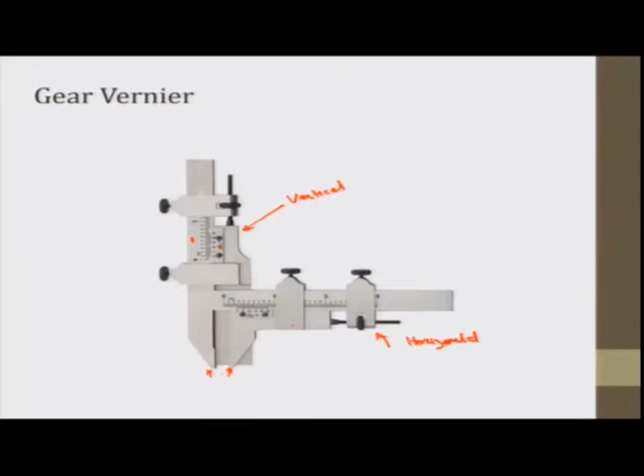So, we can see that there are two jaws, and the jaw that is connected to the vertical scale has a plate attached to it. This is the plate attached to it. The purpose of this plate is that when we try to measure the dimensions of the gear, this will lock towards the outer diameter of the gear. Okay, we will show you right now.

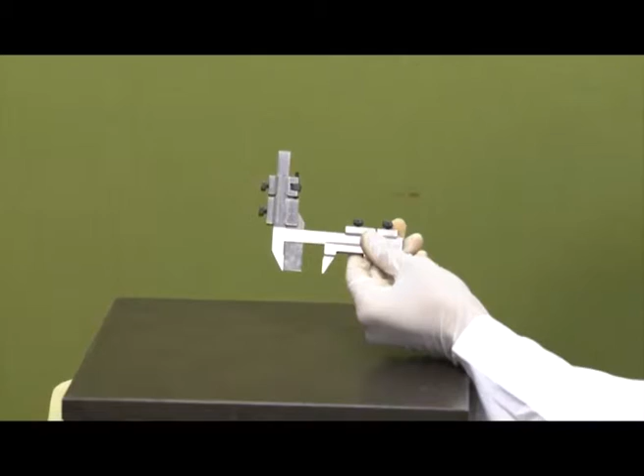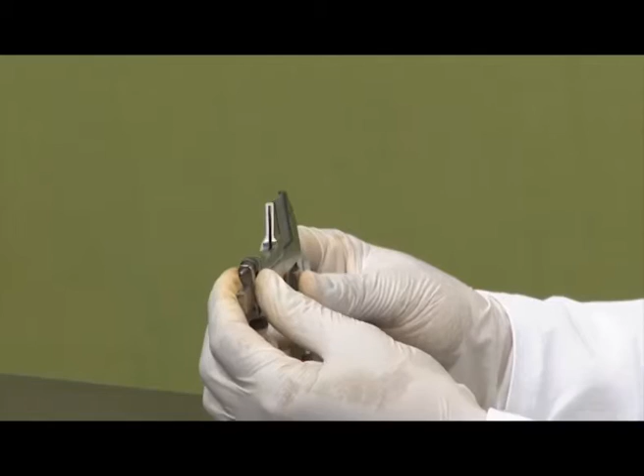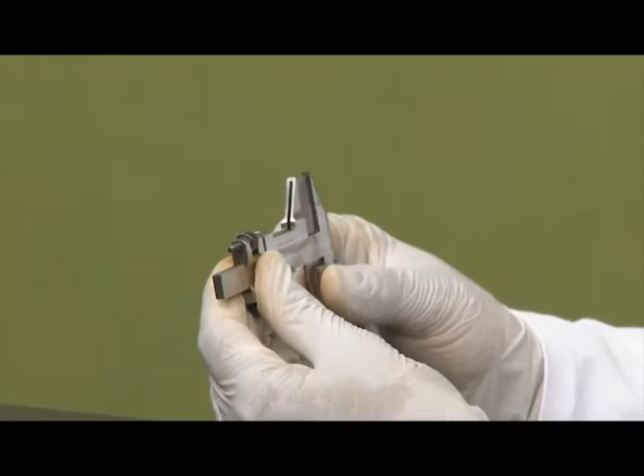And there is another horizontal scale. When I close the horizontal scale, you can see that there is a slot here in the horizontal scale, and this plate can move inside this slot. So, this is the horizontal scale, this is the vertical scale. The vertical jaw, I can say the horizontal jaw; however, this is a caliper only.

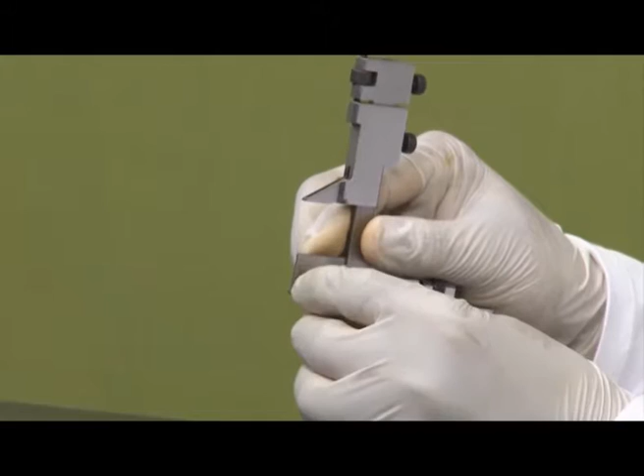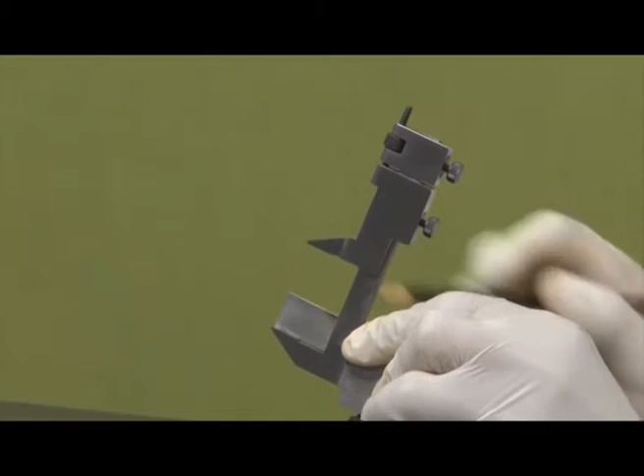So, you can see that this distance, the distance of the plate from the tip of this jaw, is about 1 mm. There is a small distance here. This 1 mm is already calibrated in the instrument.

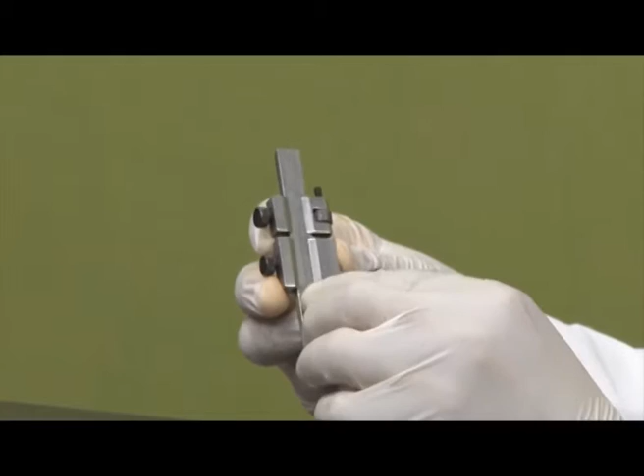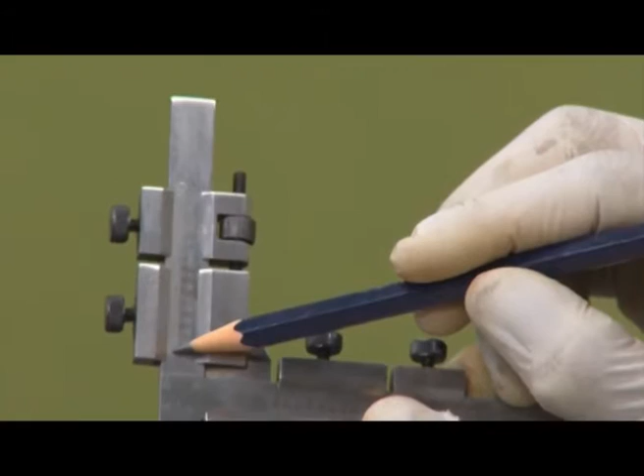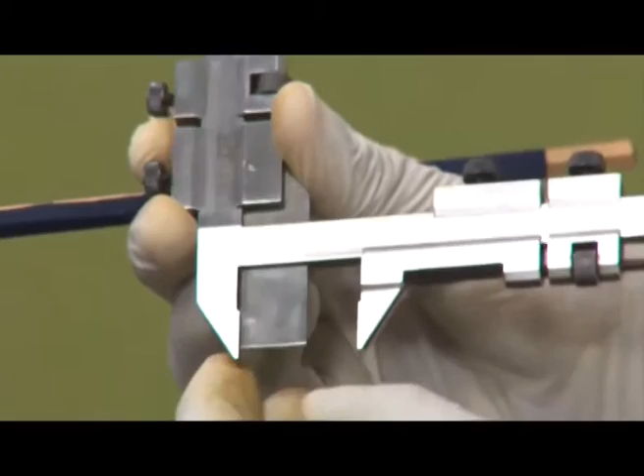If I close it here, you can see that 0 here is coinciding not with 0, but with the first reading, that is 1 mm. This 0 is coinciding with the first reading, not the 0. So, this is the adjustment that is made to adjust this length.

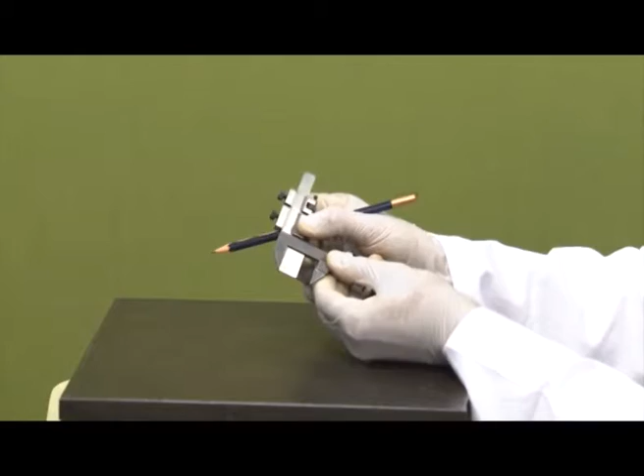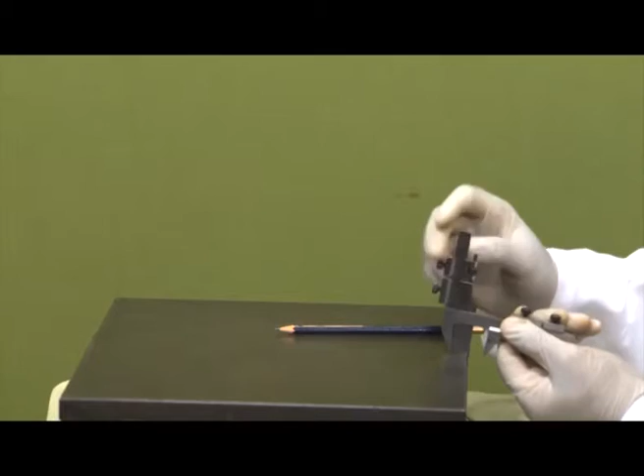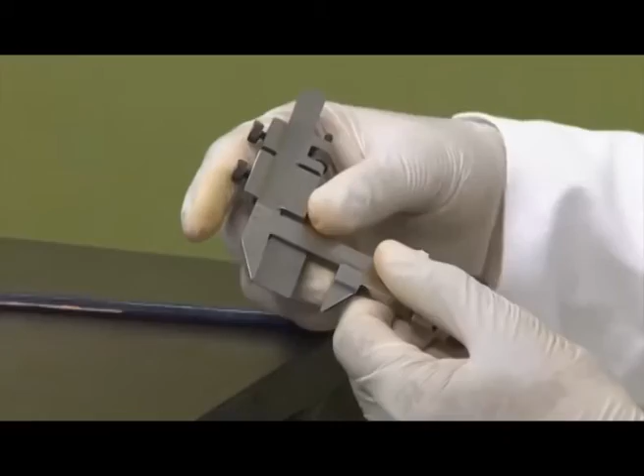However, if I remove my horizontal scale, it can extend further. So, if I touch it with a surface plate completely, then lock my screws, now we can see that this is exactly flat, and here the 0 is coinciding with the 0. But our purpose is to measure the feature of a gear, exactly the gear tooth. So, when I insert it, this 1 mm adjustment is here.

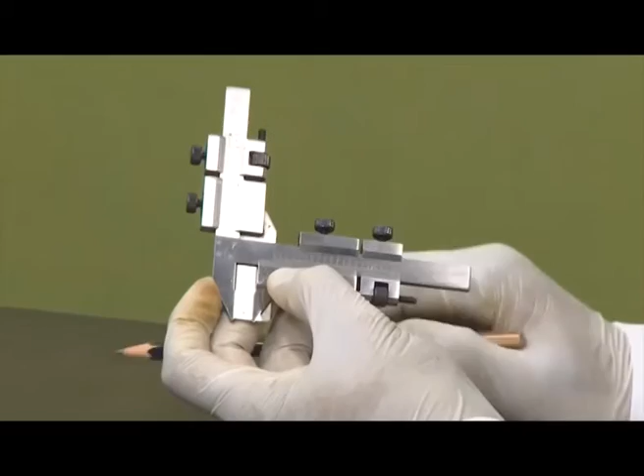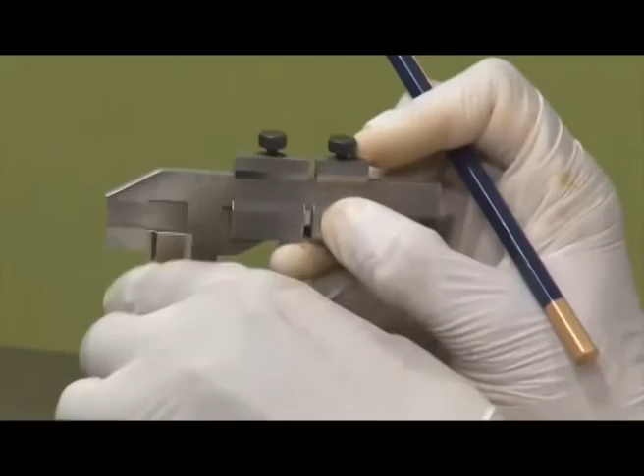Now, to find the least count, you can see that there are 25 divisions on the vernier scale. And it is interesting to note that on the main scale between 0 and 1, there are actually 4 divisions. In general, we have 5 divisions between 0 and 1, but here we have 4 divisions: 1, 2, 3 and 4.

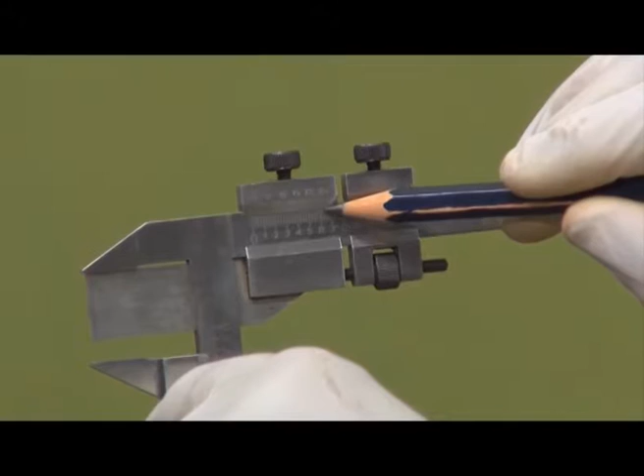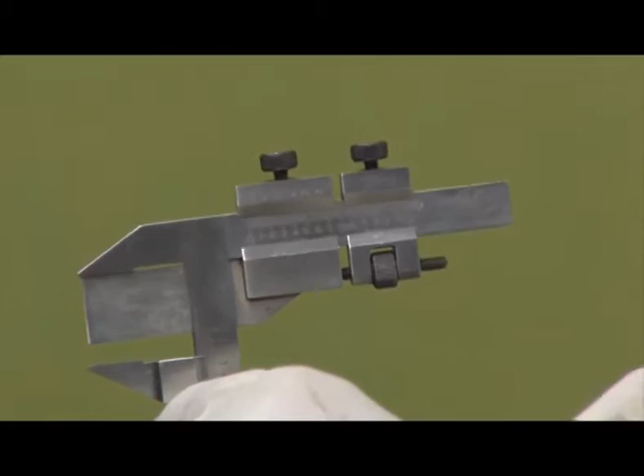So, you can see that the last reading is coinciding with 6.1. Actually, this 0.1 is the adjustment here, so it actually has to coincide with the 6th reading. So, 6 into 4 is 24, and these are 25. So, I can calculate the least count of the vernier caliper. We can see that 25 vernier scale divisions are equal to 24 main scale divisions, which means 1 vernier scale division is equal to 24/25 main scale divisions.

Therefore, least count is equal to 1 main scale division minus 1 vernier scale division, which is equal to 1 main scale division minus 24/25 main scale divisions, which is equal to (1 minus 24/25) main scale divisions, which is equal to 1/25 main scale divisions, which is equal to 0.04 mm. This is our least count.

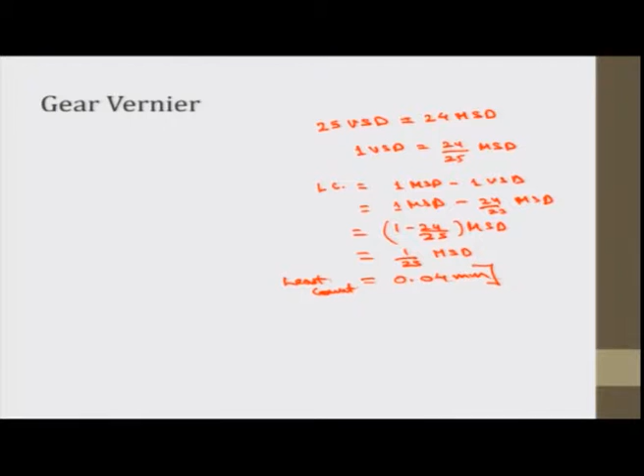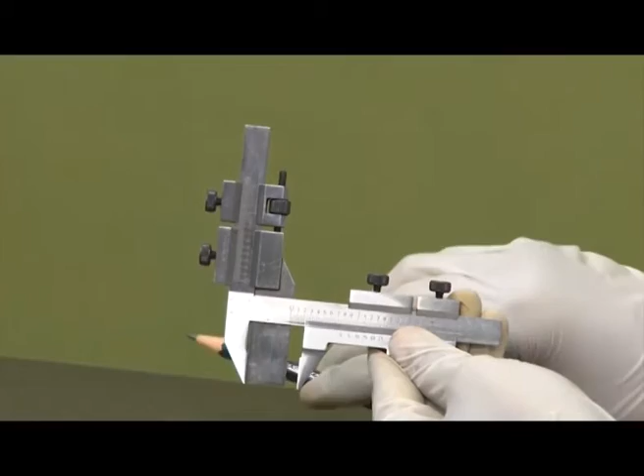So, we can see that on both the vertical and the horizontal scales, we have similar types of vernier scales, similar types of divisions. The only difference in the vertical scale was that the first division was not coinciding. It was an adjustment to make this plate enter into the horizontal scale. So, we have got the least count.

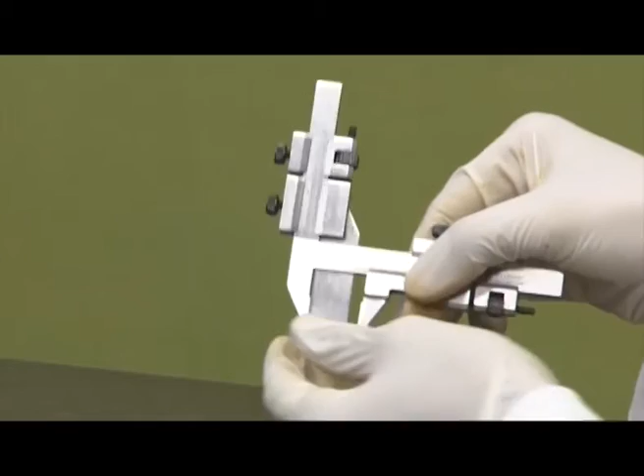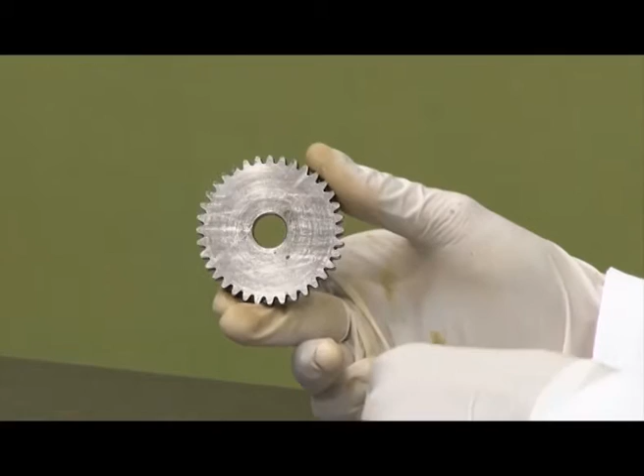Now, I have got a gear here. This is a gear with the outer dia that we have. This gear was manufactured in our manufacturing science lab at IIT Kanpur. It was manufactured on a milling machine using the indexing attachment. The number of teeth is equal to 36. Outer dia is equal to 57 mm.

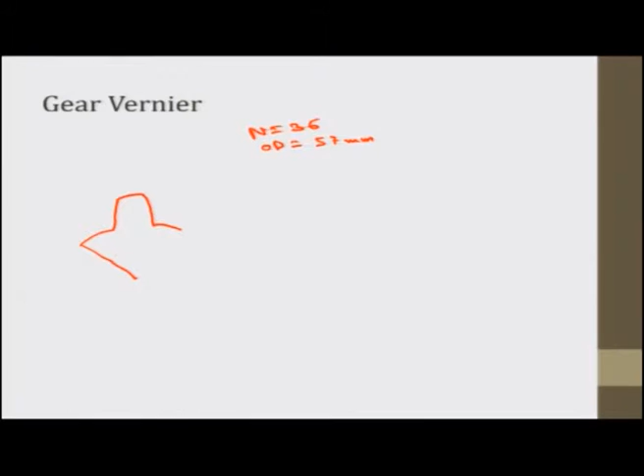So, as we know the gear terminology, if this is a gear tooth, this is our inner dia. Let me consider this as the center. This is the inner dia, and this complete, from here to here, is the outer dia, and in between here we have the pitch circle diameter.

So, pitch circle diameter is the diameter of the rollers which would rotate in a similar way as the gear rotates. It is the mean diameter of the contact between the two meshing gears. So, we need to check the thickness here, the thickness T at the pitch circle diameter. For that purpose we can use this gear vernier.

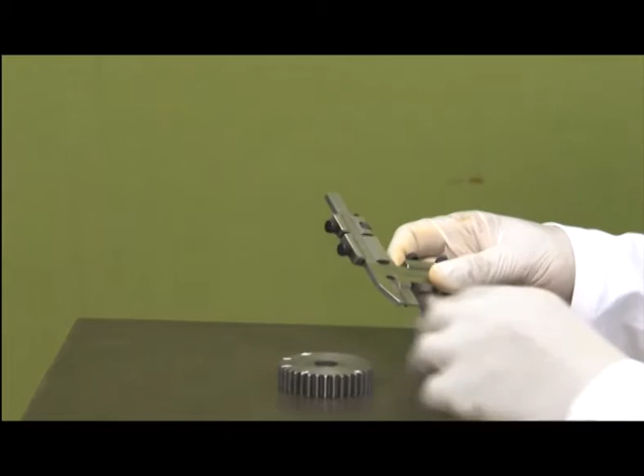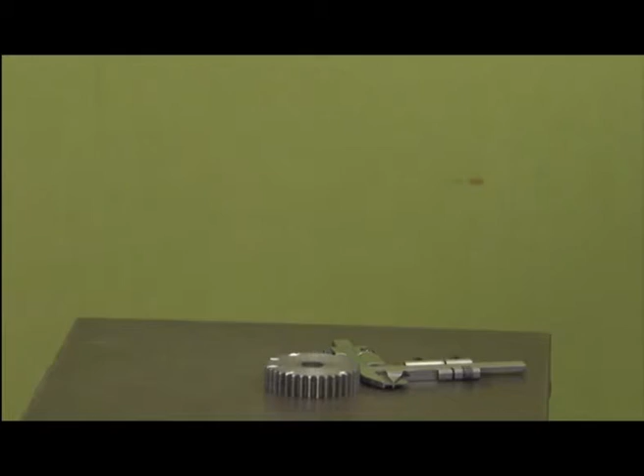So, first I need to see what is the value of addendum. Okay, let me see first what is the value of addendum. This length is actually addendum. This was taught before; this is dedendum. So, the value of addendum would be outer dia minus pitch circle diameter.

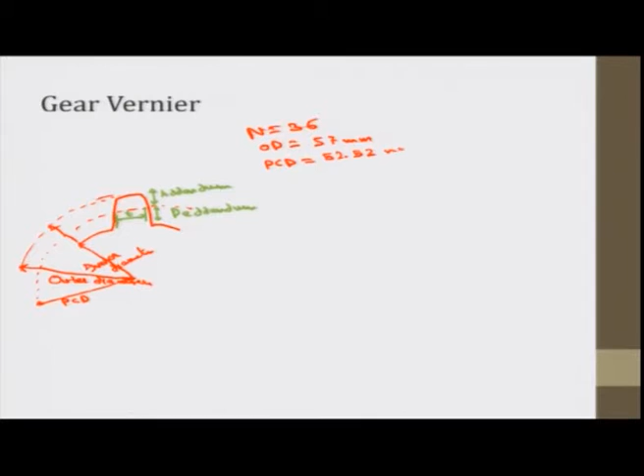So, the pitch circle diameter of this gear is 52.52 mm. So, that means if we need to calculate the addendum, addendum is the difference of outer dia to pitch circle dia, and it is half of it actually, because this is the diameter. And addendum, if I put a center here, this is the radius. Addendum will be the distance from center to radius, this distance would be the radius distance.

So, if I put addendum as A, I will put the formula first. It is outer dia minus pitch circle dia divided by 2, which is equal to 57 minus 52.52 by 2. This comes down to 4.48 by 2, which is equal to 2.24. Now, we know the value of addendum, and now we can fix the vertical scale to this location.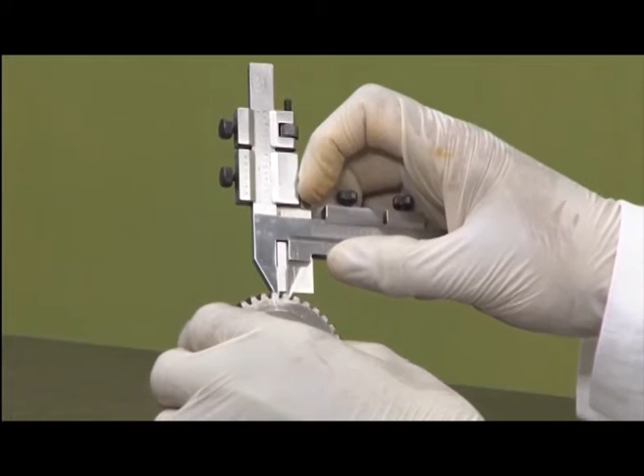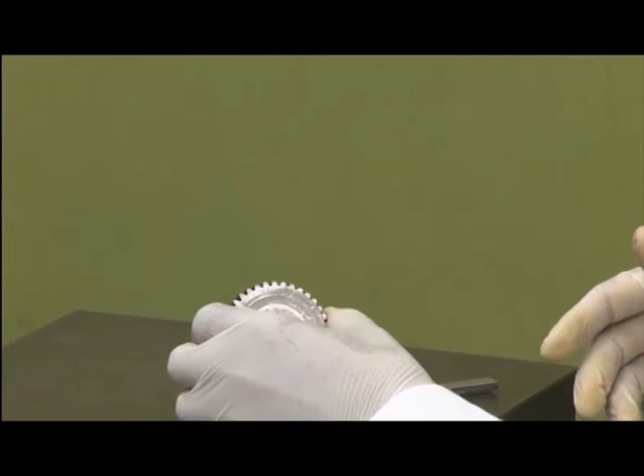So, at the depth of 2.24 from the outer dia, I will try to see the thickness of the gear tooth. So, first I'll try to fix this height. Actually, this can be inserted here. So, we need to see the thickness at the pitch circle diameter, which is the major diameter, and whatever wear and tear happens to the gear, generally the pitch circle diameter bears the maximum wear.

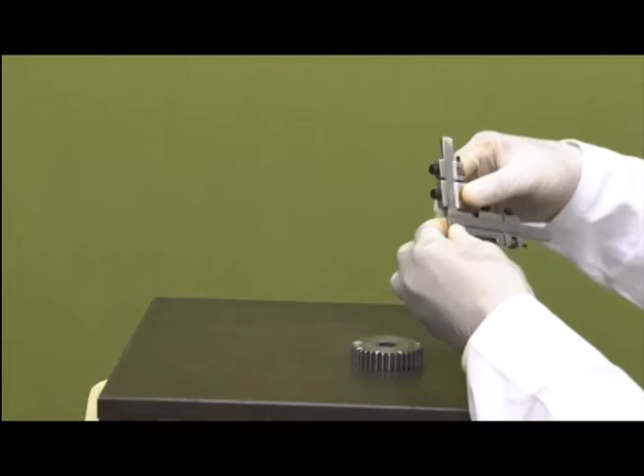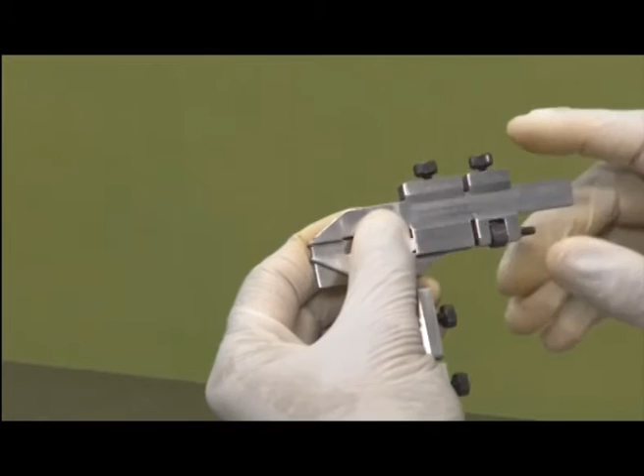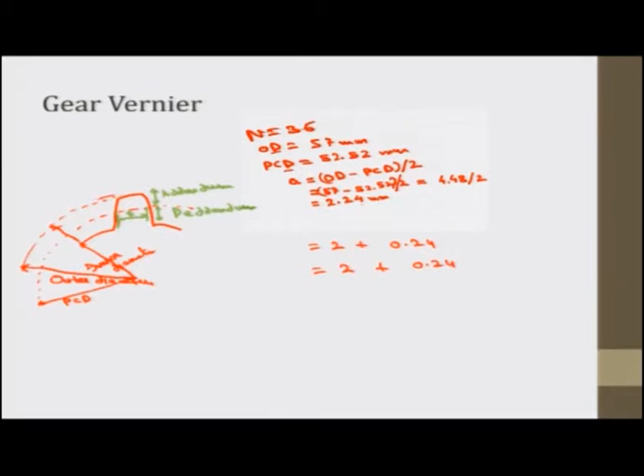So, first I will fix my vertical scale to 2.24. So, 1 mm is already there. I will take it a little forward than the second reading. For 2.24, this is 2 plus 0.24, this is equal to 2 plus 0.24 by the least count 0.04. This is main scale division, this is vernier scale division. So, second division of the main scale and sixth division of the vernier scale.

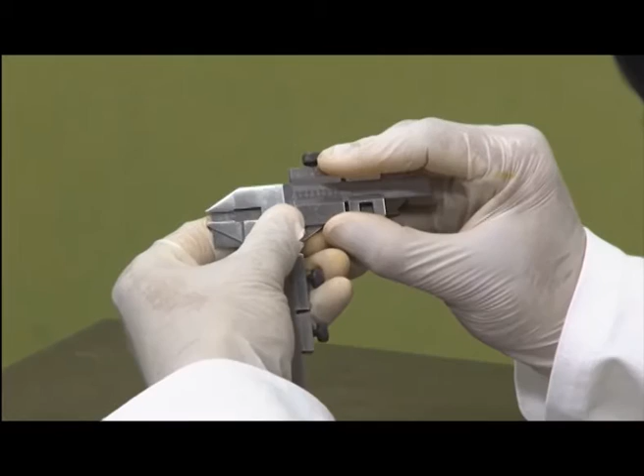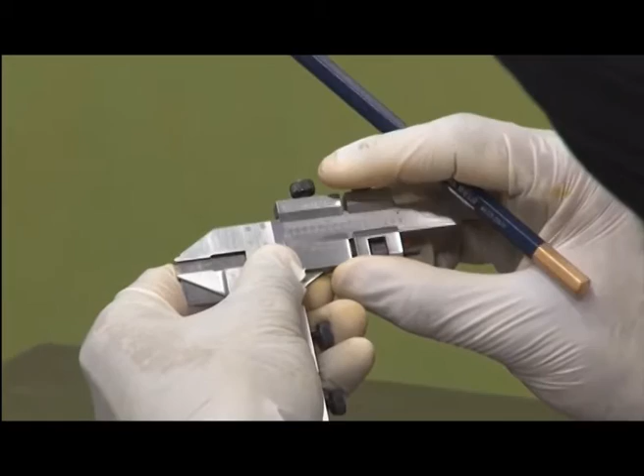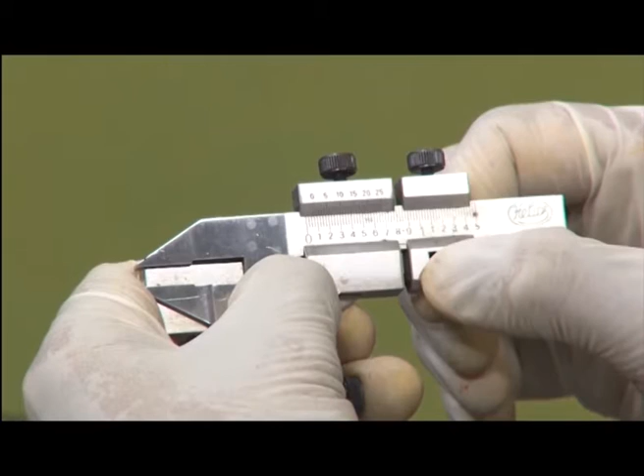So, the sixth division after the second division of the main scale has to coincide. So, I will take it a little forward from the second division. After that, sixth division, 0, 1, 2, 3, 4, 5, sixth division has to coincide. So, it has to be a little fine adjustment. I will take it closer to the sixth division, lock this fine adjustment screw clamp. Using the fine adjustment screw, I will try to match the sixth reading. Okay, lock it. Almost perfect.

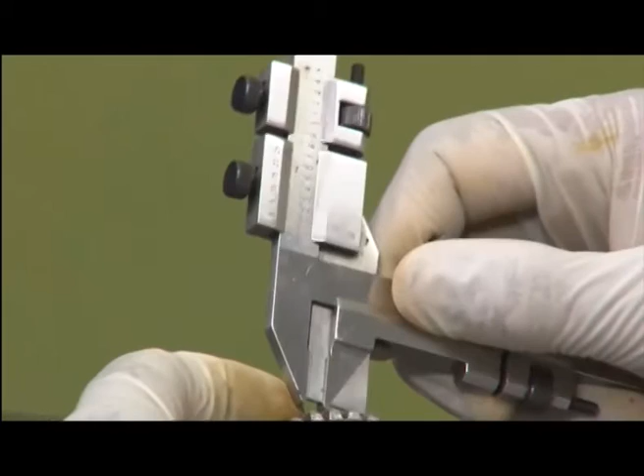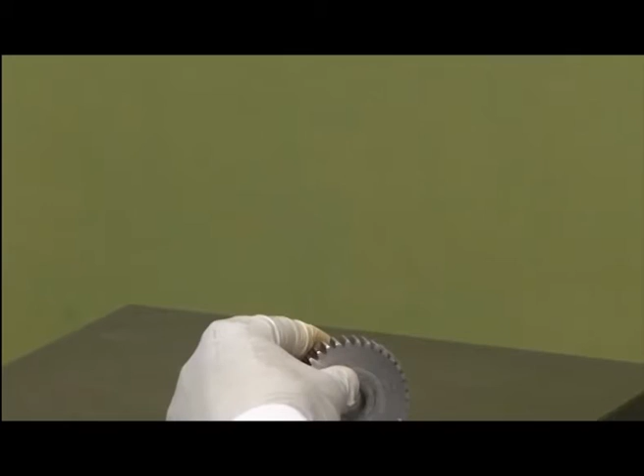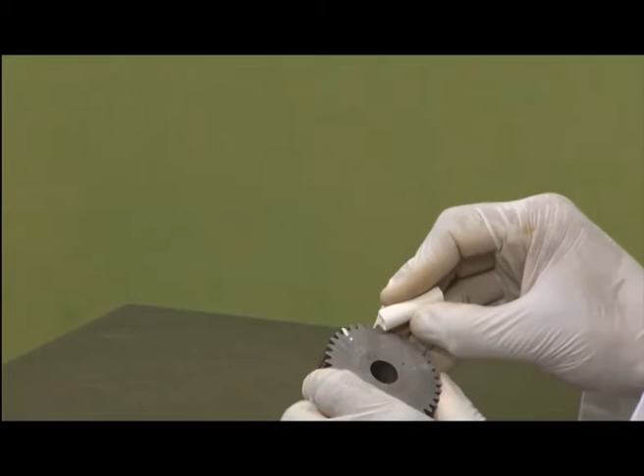So, now this height is 2.24, which is the length of addendum, and when I insert my gear vernier to my gear, it will reach the pitch circle diameter. Now, I would like to see the thickness here. First is the sample selection. I like to select a few teeth, 1, 2, 3, 4, 5. Let me say I select 5 or 6 teeth which are equidistant apart. I have marked them with chalk here. These 6 teeth I will select.

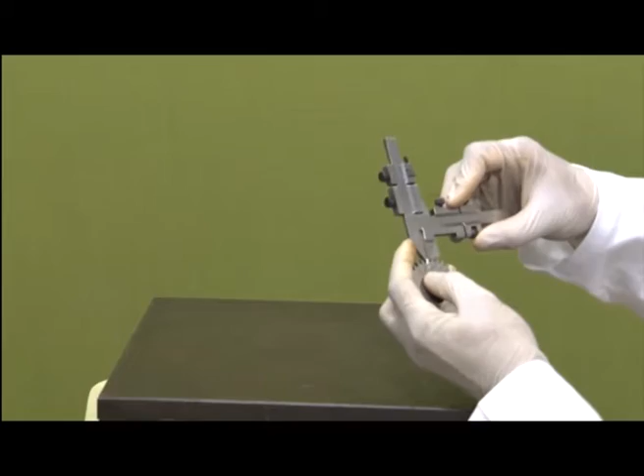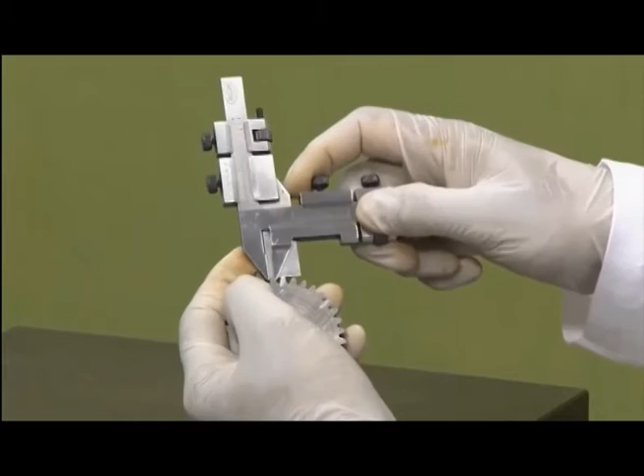Also, along the axial direction, this was along the radial direction. Along the axial direction, I will take more than one reading, maybe 3 readings per gear. So, let me try to take this reading on this first tooth here. I will take it forward, it is almost locked, lock the clamping screw. With fine adjustment, apply appropriate force, not very large and not very loose, so that it touches properly. Okay, it has touched properly. Now, I lock this thing and note the reading.

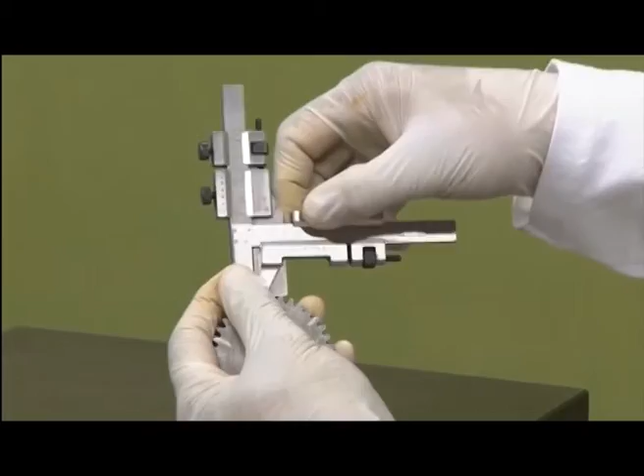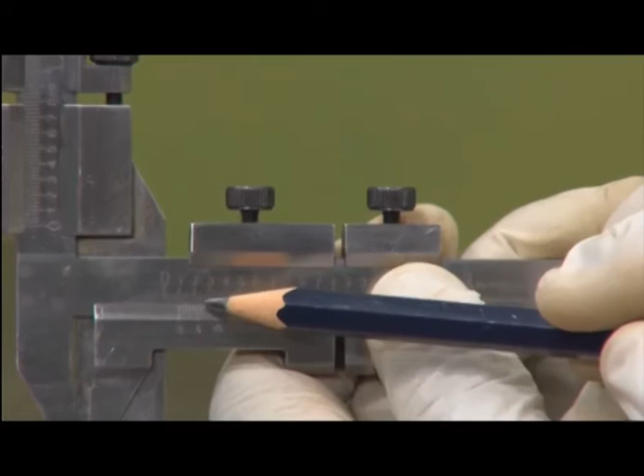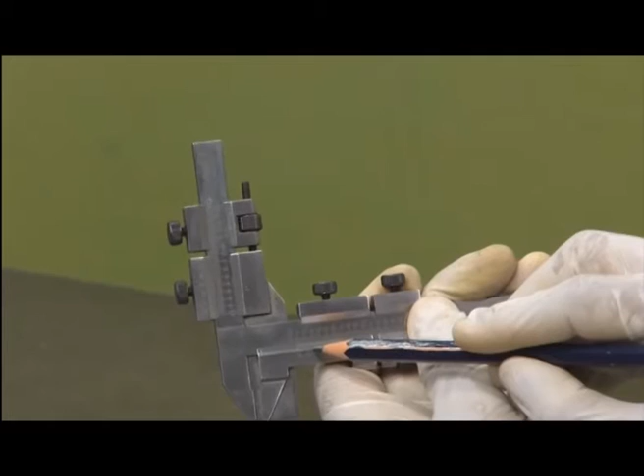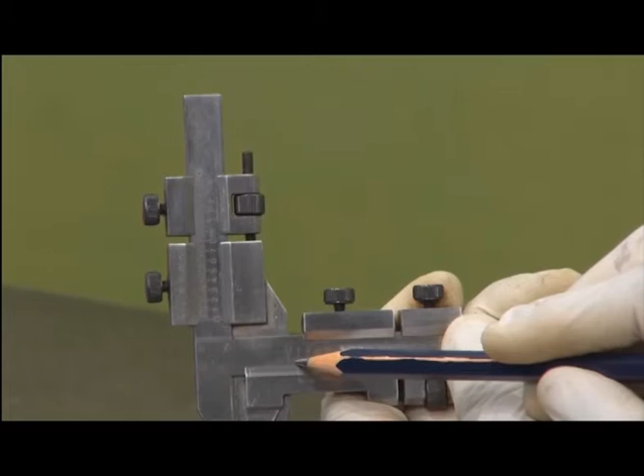So, after I had locked both the screws, we can see that it has exceeded the 4th reading of the main scale. One reading of the main scale is actually 1 mm. After exceeding the 4th reading, I need to see what reading of the vernier scale is coinciding with the main scale. So, the 16th reading. Sorry, it is exceeding the 3rd reading here on the main scale, because there are only 4 divisions. So, after 3rd, the 16th reading is coinciding here.

So, the value of the thickness of the tooth, tooth thickness. I'll pick tooth 1, tooth 2, tooth 3, tooth 4 and tooth 5, reading number 1, 2 and 3. So the first reading for the first tooth, I'll do the calculations here. It is actually 3 in the main scale reading plus 16 into 0.04. This is equal to 3 plus 0.64, equal to 3.64. So this reading is 3.64.

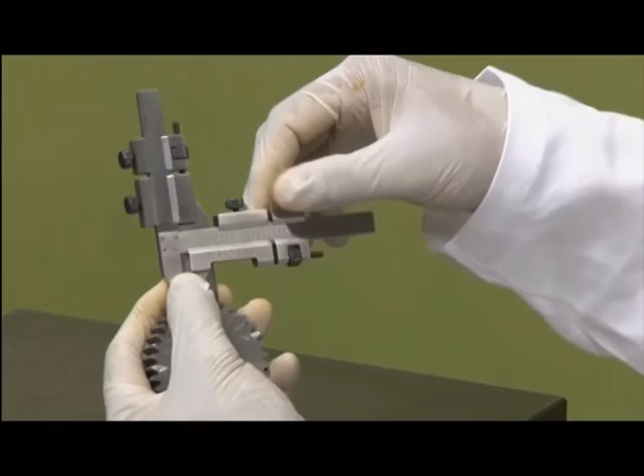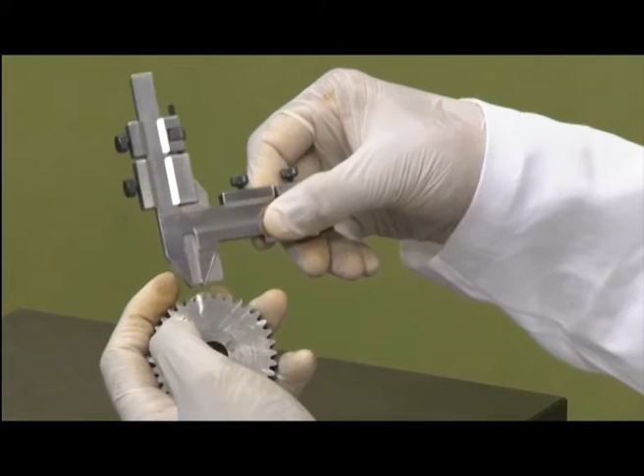Similarly, I can pick the same tooth and take the reading at the center. Let me loosen these clamps. Okay, loosened it. Again the same principle, I will touch it with the fixed scale first and tighten the fine adjustment screw clamp. Using the fine adjustment screw, apply moderate pressure here.

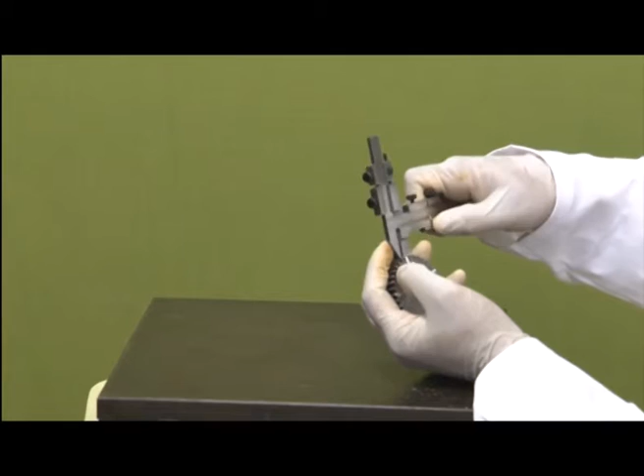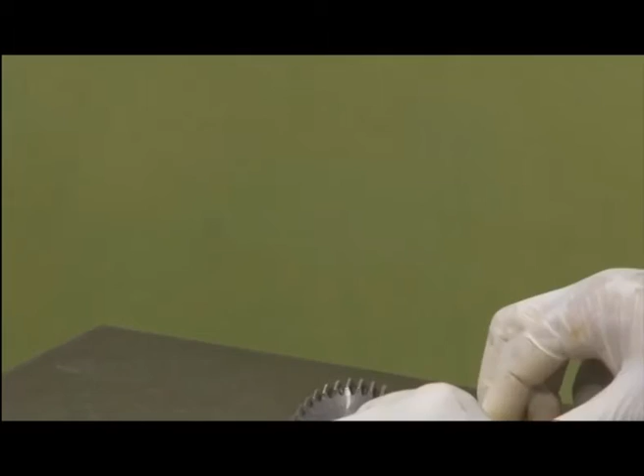Okay, actually it has to be kept properly like this, not in hand. The best way to do it is to lock it in a press vise or in a machine vise. When we lock it in a machine vise, it wouldn't move. So we'll do it like this. I lock it, locking it, checking the reading again.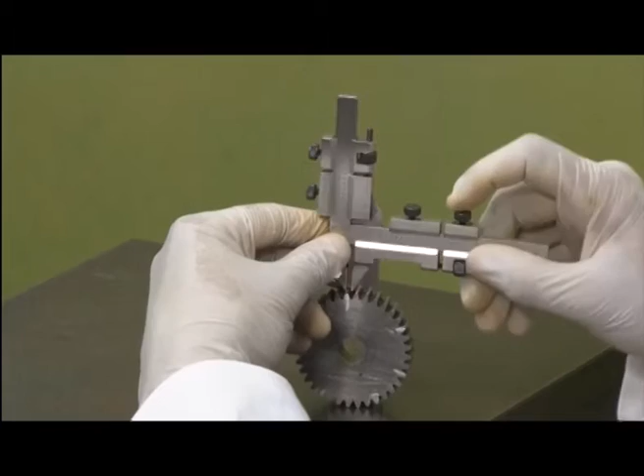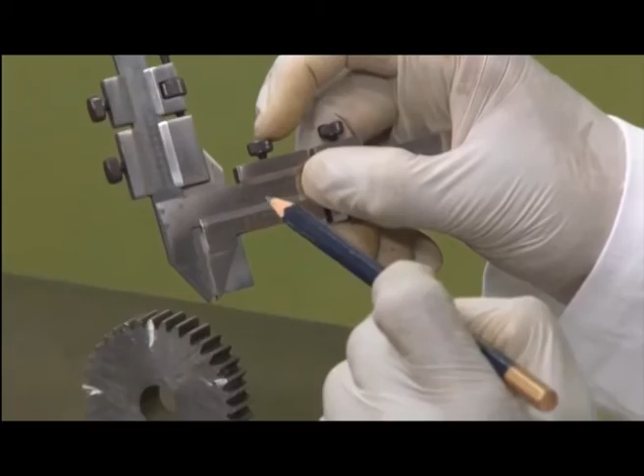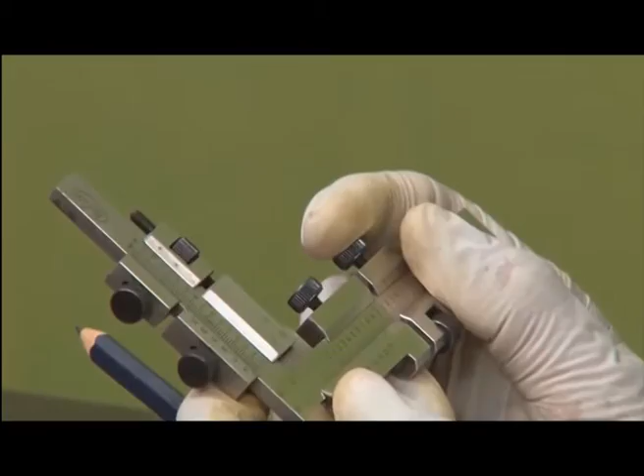You can see that it is again exceeding the third reading, but this reading, the sensitivity towards the second place of decimal might vary. So let me see, avoiding parallax error, the reading that is coinciding is, wow, it is 15th reading. 15th reading of the vernier scale is coinciding with the main scale. So let me note down this value. For the 15th reading, this value would come to 3.60.

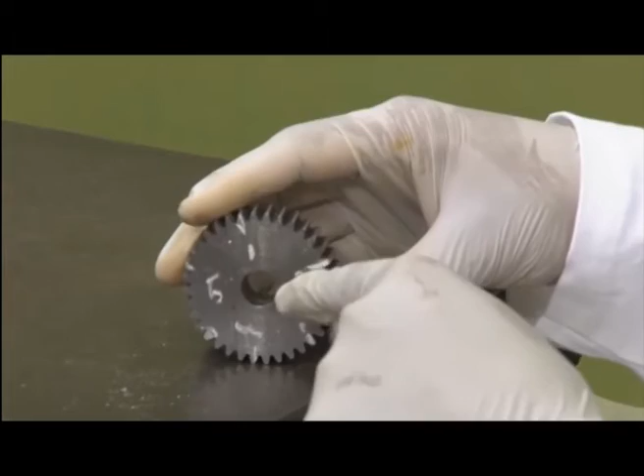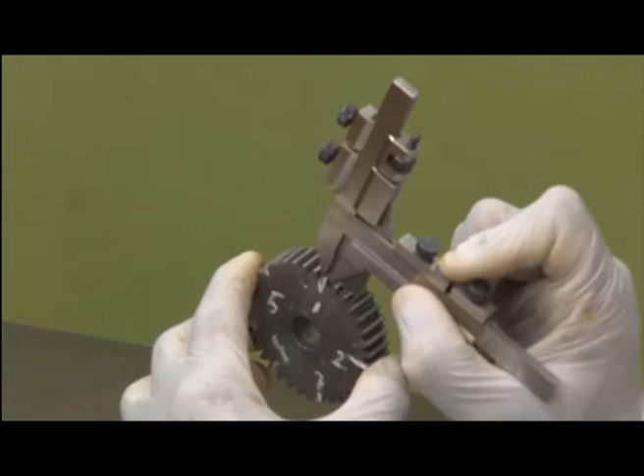Okay, I have put the numbers here 1, 2, 3, 4 and 5, so as I do not mix the teeth in the further observations. So I am just checking the first tooth. I have checked it at one point, at this end, at the center, and I will try to check it at the third point.

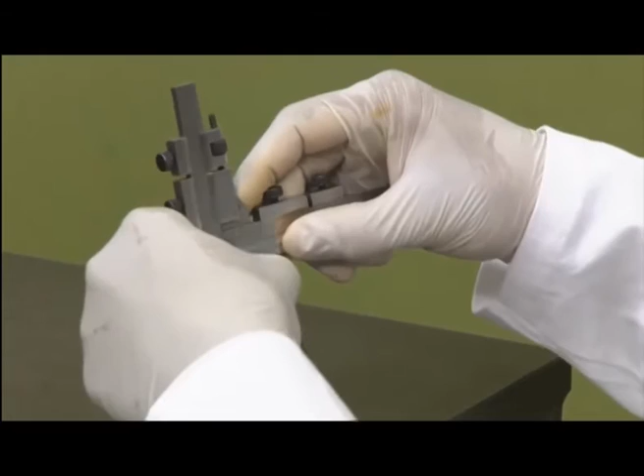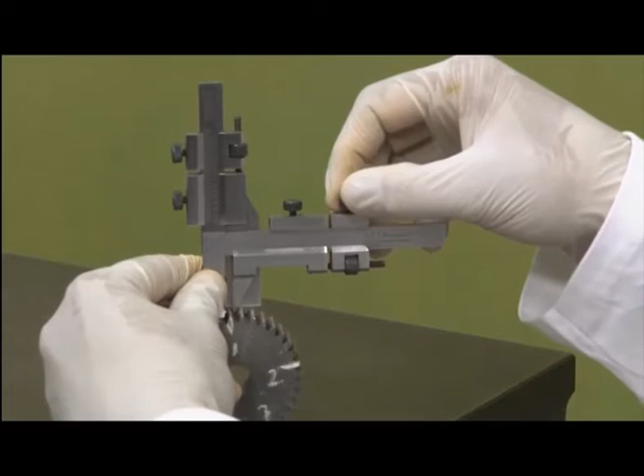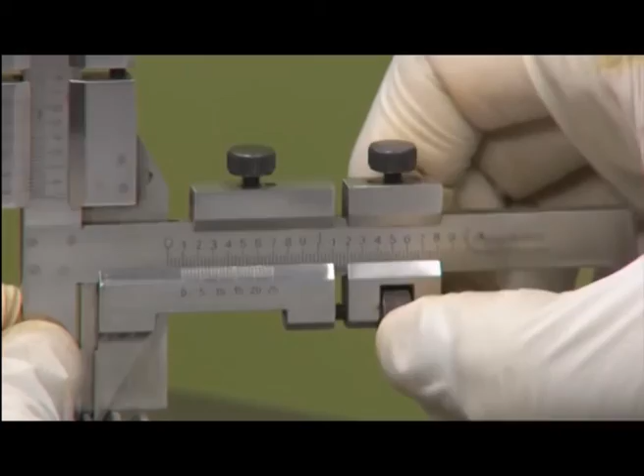For the third point, again I will loosen the screws, open my caliper and touch the fixed jaw, this is kind of a fixed jaw now, take this further, then lock this, then apply appropriate force, then lock this screw. Okay, now the screws are locked. Now let us check the reading again.

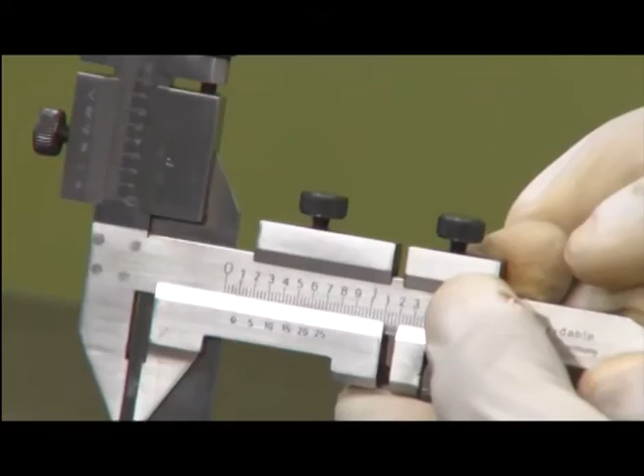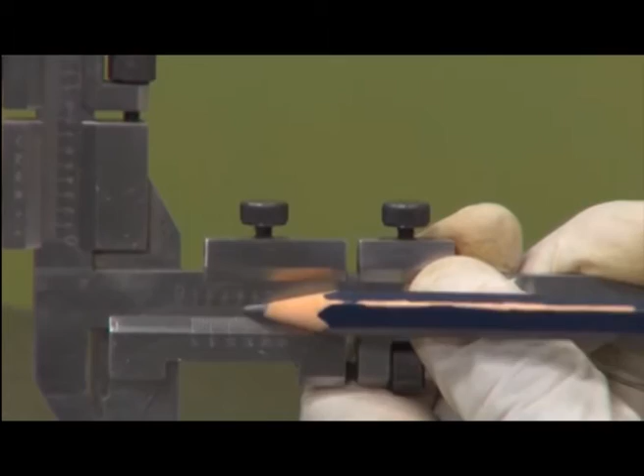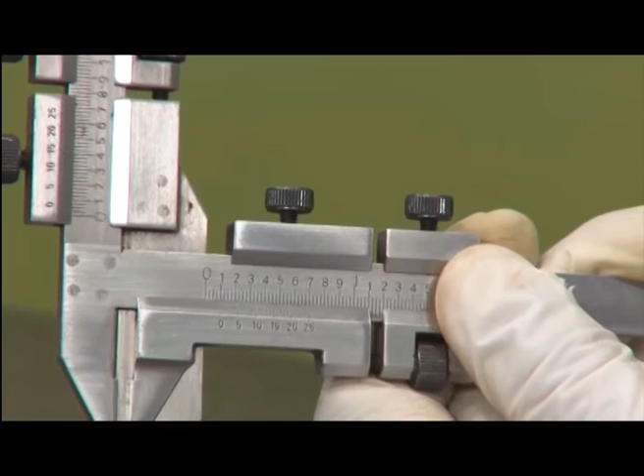So it has again exceeded the third division on the main scale. Now let me see which is the coinciding point here. Wow, again the 15th reading is coinciding. We need to see both the scales here. The 15th reading of the vernier scale is coinciding with the reading of the main scale. Okay, this is actually a close observation. You can wear some spectacles if you like, or you can also use a magnifying lens to see this. So 15th reading is coinciding.

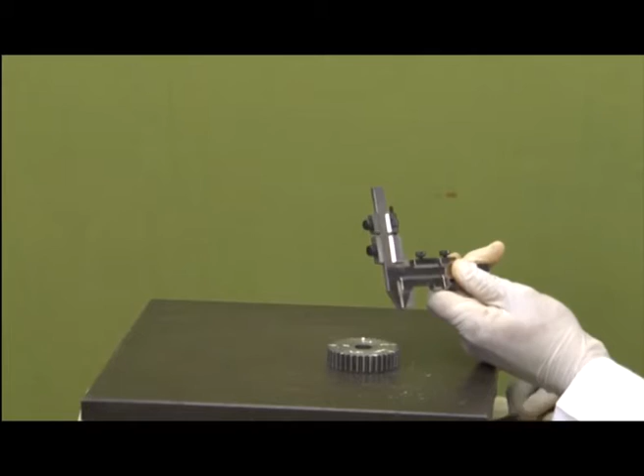So it is interesting to note that the readings are quite close here. So for the 15th reading again, this value is 3.60. So the average of 3.64, 3.60, 3.60 comes down to about 3.61. Okay, this is average, you can call it group average. Now I will just take a small break, do other readings and note them down here. Then we will see how the gear is behaving.

So I have saved some of your time and taken the readings from 5 teeth here, with 3 observations for each tooth. So you can see that in the second tooth 3.62, 3.60, 3.62, in the third tooth 3.58, 3.64, 3.60. Okay, the fifth tooth is a little outlier. If I calculate the average here, it would be close to 3.57 for the fifth tooth. For the second tooth it would be close to 3.62. This is actually 3.56, close to that.

And for the third one it will be close to 3.60 again. So based on this, I am not calculating the exact overall average. I can just say that the overall mean is close to 3.60. So based on this, 3.60 is my thickness of the tooth at the pitch circle diameter. So this is the overall mean.

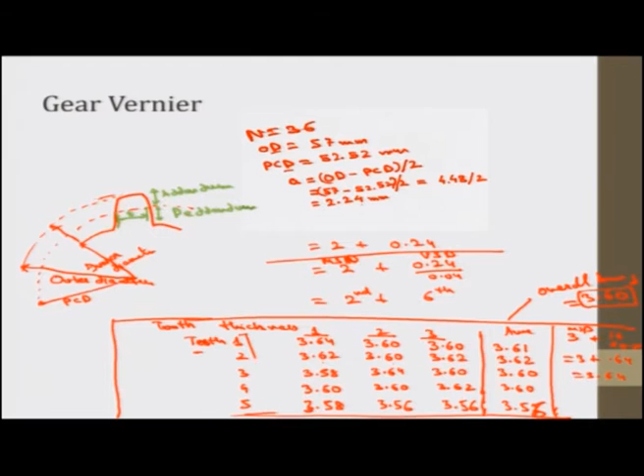Also I think I can use the same data. I have generated a very beautiful data here, so I can use it in statistical calculations as well. I can use the overall average. I have 5 groups, and the group size is 3 readings per group. We have generated primary data here, and I will take this to the statistical analysis to find the group means, mean, median, mode, range, all those things we will tell you there.

So this is the application of the gear vernier. Gear vernier is not essentially used while we manufacture the gears. It is used during inspection. When the machines are running, if some of the gears is showing some play or some sound is coming, we can check whether the tooth is deteriorated, whether the wear and tear is enough to replace it or not. For that, gear vernier can be applied.

So the precautions and guidelines could be similar as we had before for the vernier caliper and the other instruments: cleaning of the instruments, placing the instruments properly, pressure, proper calibration, zero error, all those things had to be tested. So this was about the gear vernier.